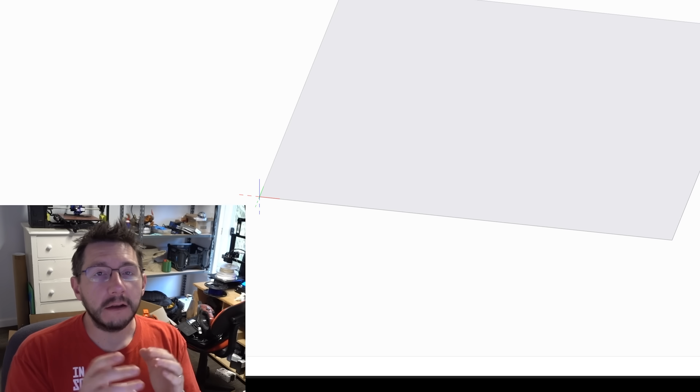Enjoy. Here we are, we're at the computer and I have Canvas loaded up.

What I want to do first is configure it the way I want it. Here's my color palette that I can use. I'm going to configure color 4 to be white, because that's kind of what I want. Now, since I'm just showing you something and not setting up an actual print, I'm not worried about default materials. I'm just going to pick PLA, because why not?

Why not? That's Big Ben right there, that big clock over in London. I hope to see it one day in person.

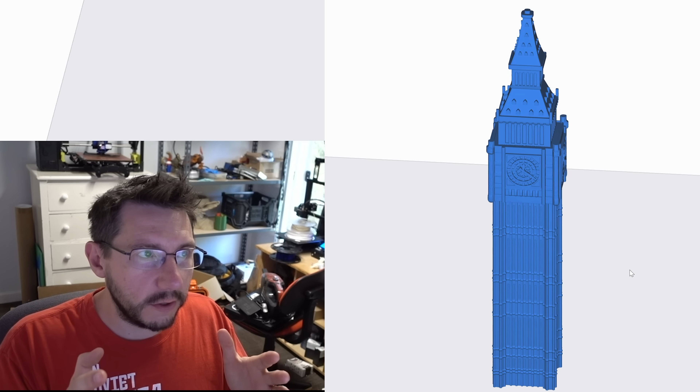That's Big Ben. So what I want to talk about, as far as forced perspective, is it's where an image only looks correct when you're looking at it from a very specific angle. With Big Ben here, let's imagine this is a big building. What I want to do is stamp '3D Printing Nerd' across the building, but I only want it to look correct from a certain angle.

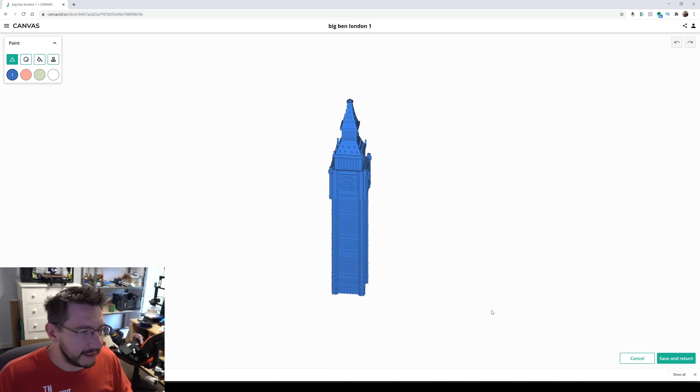Okay, so I'm going to go over here and upload an image. It looks at what colors are in there and boils it down to, I think, four that it can find—the four predominant colors—and then you have to match those colors versus what you have configured. My project has blue, red, green, and white. My logo only contains blue and white because it's so simple. I want the letters to stamp, and I want the blue part to be transparent.

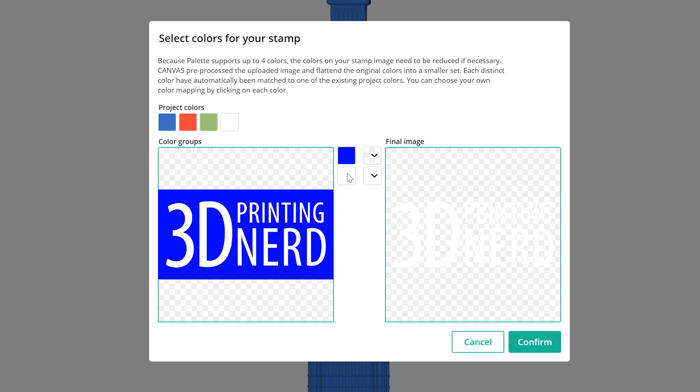And so the blue part, I can pick transparent right here. And then the white part, I'm gonna pick white. That's easy. I'm gonna confirm. And I have some controls here of moving it around and scaling it and stuff like that.

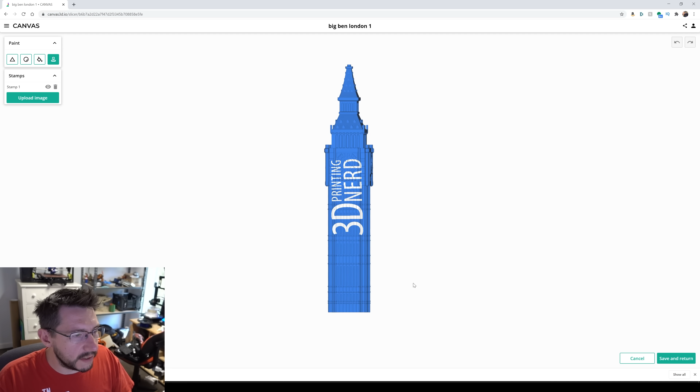So let's do this, let's just do that right there. I'm gonna place the stamp, and then bam, just like that, Big Ben now has 3D Printing Nerd stamped on it. Because it stamps based on the viewing angle, it looks correct here, but if I go like this and like this, then if I was actually in London looking up at Big Ben, it would look like this.

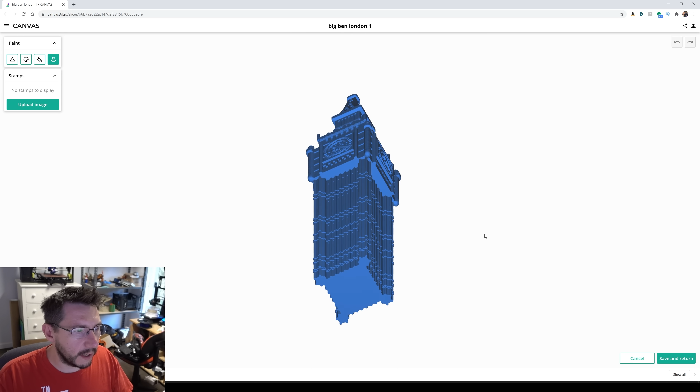That's kind of weird. Now what we can do is use the stamping tool to do a forced perspective. I'm gonna go like this to pretend I'm looking at it from street level. Remember, blue is gonna be transparent, white is white. I'm gonna confirm. We're going to spin it just a bit and make it just a bit bigger, just like that. Now, because remember, we're staring kind of up at a building, place the stamp. So there it is right there. And it looks correct, but...

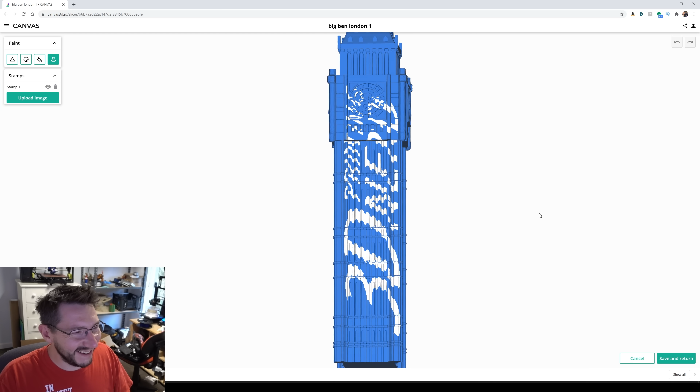That looks weird, right? So what you can do now is just sort of go like that, and there you go. That looks really cool.

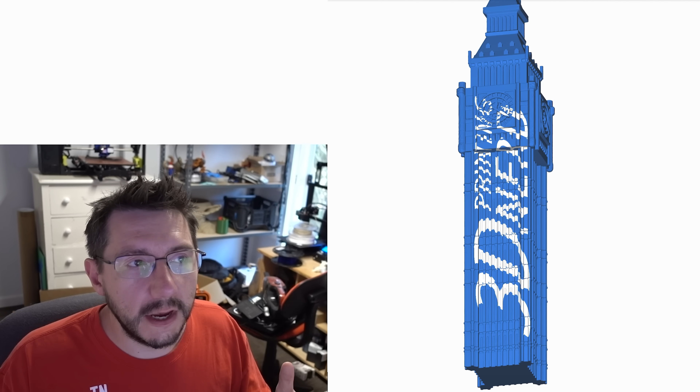And really, this is a fun tool because it allows you to do all sorts of really cool, creative artistic things that you might not be able to easily do in other modeling programs. So you can create a shape, and then create certain views of it depending on the angle at which people are looking at it. That, I don't know, that just blows my mind. I think that is really, really cool.

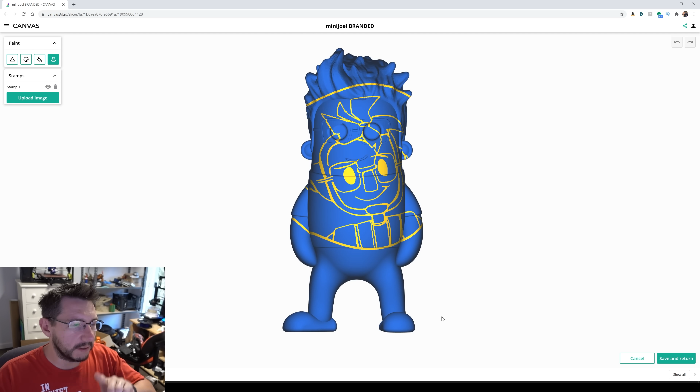Here's what I did, Wexter's Mini Joel. You can, I mean, he looks great. So then what I did is I stamped on my little circle Joelbot. I've got blue and I have gold loaded up in the Raise 3D Pro 2 Plus. I think what we should do is print this out and take a look. Let's do it.

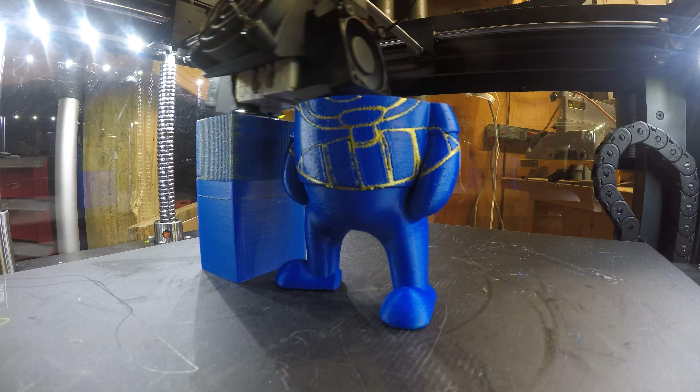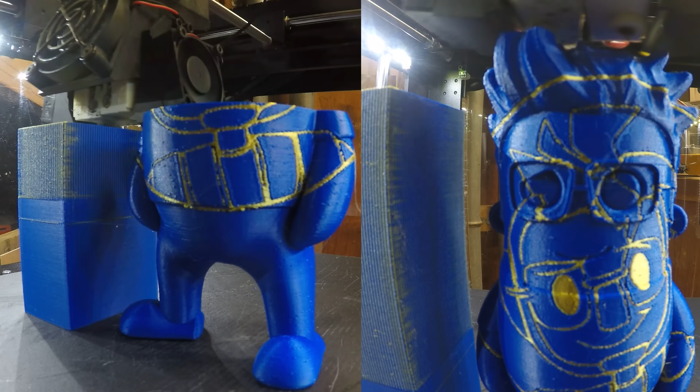Well, that was a lot of fun. It produced a really cool model. I just haven't had the chance to play with that because I completely forgot about it. But 3D printing for a new perspective — think about it. You can reorient a model within Canvas and then stamp an image on it. And I like to think of it almost as if you stamp something on a building, and looking at it head on, it doesn't make any sense. But as you change your perspective and look up at the building, all of a sudden everything lines up and you can see the hidden image thanks to a new perspective.

So with that, the lost episode of 3D Printing Nerd is coming to a close.